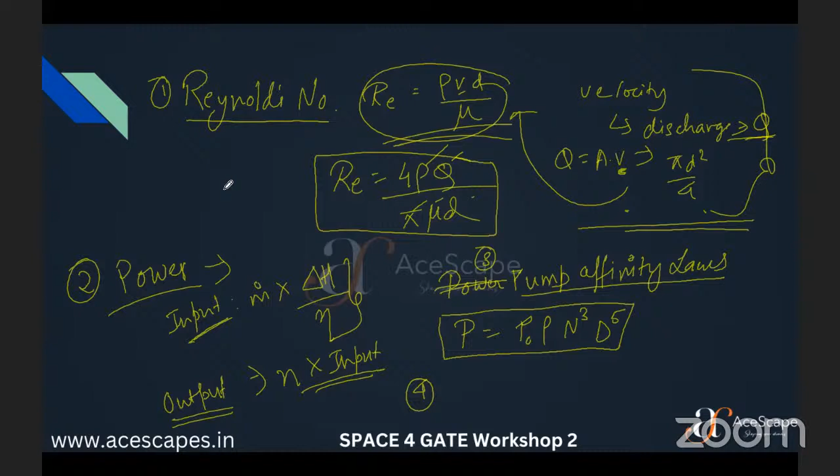Fine. This is 3. Another thing you will come across is when there is a cylindrical flow. Is there a next slide? There is no next slide. Okay, fine, I'll write it here only. You all wrote it, right? Because now it won't be visible. Wrote all the formulas?

Yes, ma'am. So there is going to be this cylindrical pipe, and they'll ask you about the velocity, the shear stress, head loss, etc., for the flow inside this cylinder. I've explained these kinds of flows in much detail in the classes I took previously, so you can check those lectures out. Here I'll quickly just give you what we have to apply.

So here R is the radius of the pipe, L is the length of the pipe, shear stress is happening across the wall, and there is some velocity U by which it is flowing. Let us say there is some pressure P1 and pressure P2. This small distance will be our dx or delta x, and the small pressure drop will be delta P, which is P2 minus P1, right?

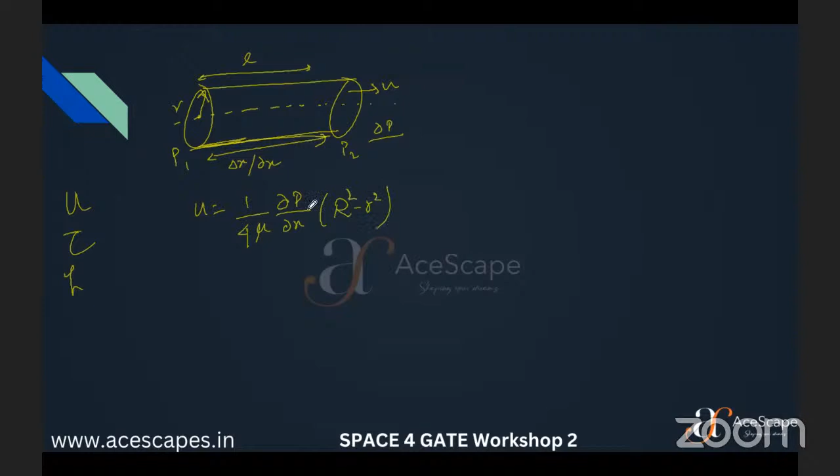So U, the velocity profile, is given by 1 by 4 mu dp by dx, times capital R squared minus small r squared, where capital R is the full radius of the cylindrical pipe, and small r is the point where they have asked us to find the velocity. Say this R is 5 meters, and they ask for the velocity at radius 3 meters. So small r here will be 3 meters. It will depend on the question.

This is your formula for u, the velocity, and your shear stress is given by r by 2 dp by dx, where r is the radius where they have asked, and dp by dx is the pressure gradient. They will give you the pressure gradient directly, or they'll say the pressure drop is, say, 30 kilopascals across a length of 5 meters. You have to apply it like this. Is it clear up to this much? Yes, ma'am. Start solving questions and then we'll see what else we have to do.

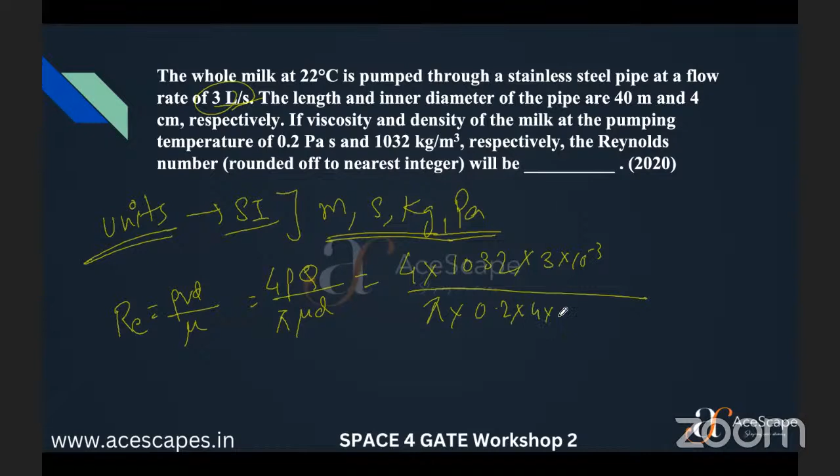Second one. So what we had to do: density is 1032. Q here we had to be careful with. It is given in liters per second, we had to convert it to meter cube per second, right? Then pi mu 0.2, and d here is 4 centimeters. So this is coming as something around 492 point something, right? Okay, confident. Now I'll move to the next question.

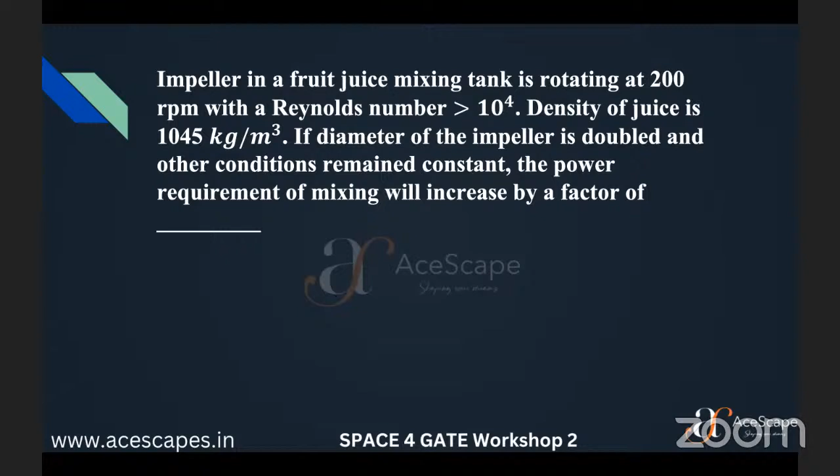Easy peasy, yes or no? Public. Yes, sir. Okay. Isha, guys, if I'm sharing the whiteboard, is it visible? Are the slides visible to you or not? Are you sharing, sir? No. I shared this slide. Stop sharing. I'll stop sharing so that you can share. I have shared this. Can you see the whiteboard? Yes, sir. Isha, have you answered it? Yes, I can share. Okay. So.

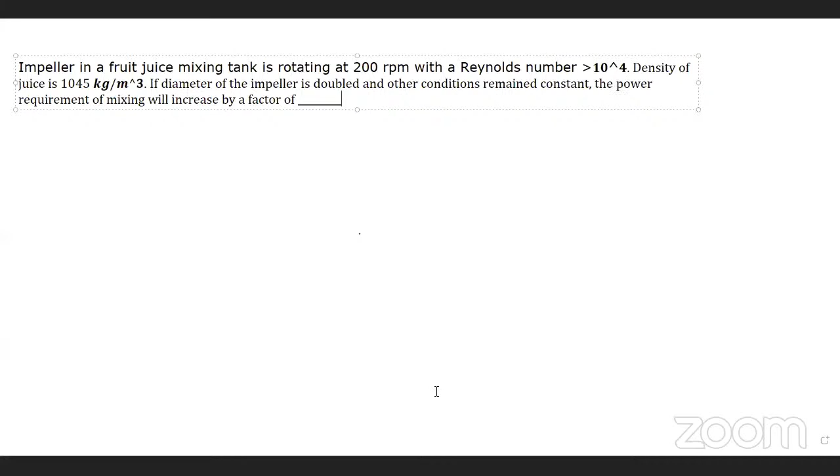Okay. Public, I can see only 9 people have answered out of 33. Not good, not good. Some are going 1 by 32, maximum are going 32, 1 by 16. So there is a distribution of answers everywhere. Visible, public? Yes, sir. How many have given the answer in the poll?

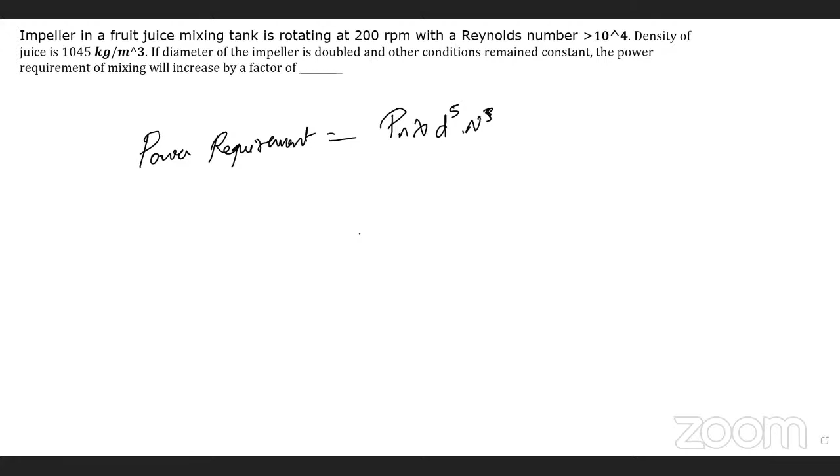But for the time being, you remember this. Power consumption or power requirement is directly proportional to this and this and this. So we have to remember P is proportional to D to the power 5 when everything else is constant, density, viscosity, everything is constant. And P is directly proportional to n cube when diameter and all other properties are constant. Same for Q, D cube, and this Q is directly proportional to n.

Another term, any other one, public? Pressure, right? One is power, discharge. Another is what? Forgot? Pressure head, right? It is proportional to what? D square. And it is directly proportional to what? N square. Yes or no? Yes, sir.

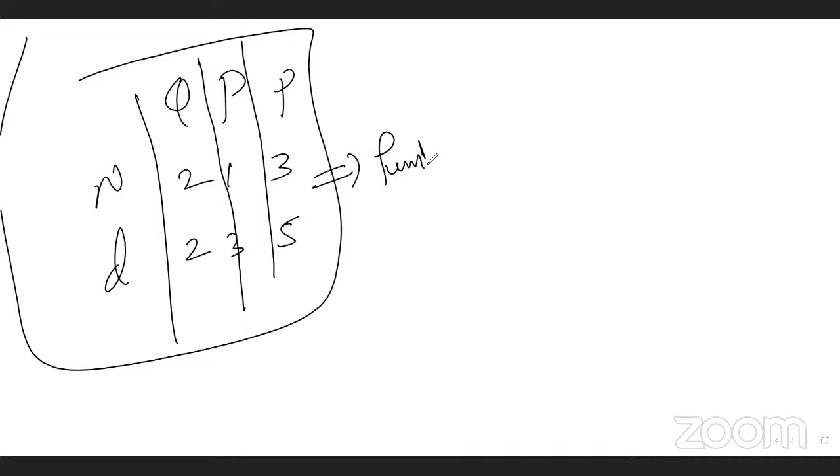Yes, sir. So how do you have to remember? Q, H and P and D. What? 1, 2, 3. Yes or no? Will you remember the table? Yes, sir. So this is pump affinity, mixing impellers and power loss. One will come in all three. Okay? Clear? Yes, sir. It's nothing, this is just a way to remember it. Easy. Let's go next.

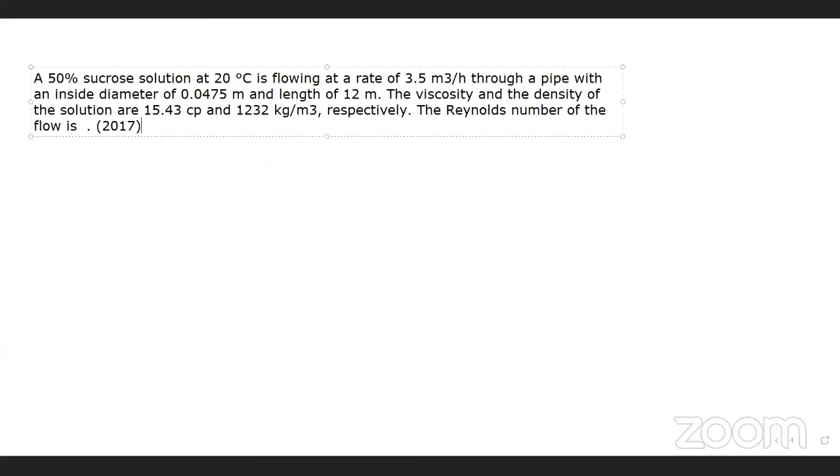Is the next poll visible? No. No, sir. Now, yes. And those who are not able to see the poll, I am just dropping the question here only. Isha, are you ready for the next question? Isha? Is my whiteboard visible, everyone? Yes, sir.

So this is the same concept which Isha has taught recently. Yes or no, Isha? Hello, am I audible? Things which are most common. That's it. Those who have answered taking this into consideration, it's over, game over for you.

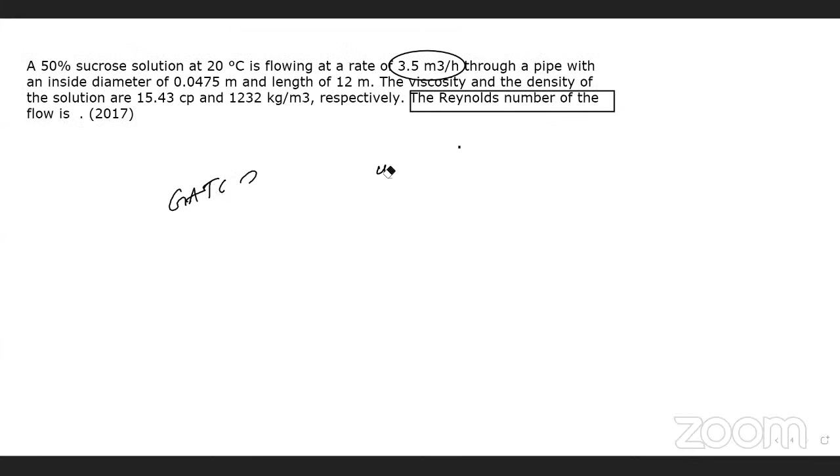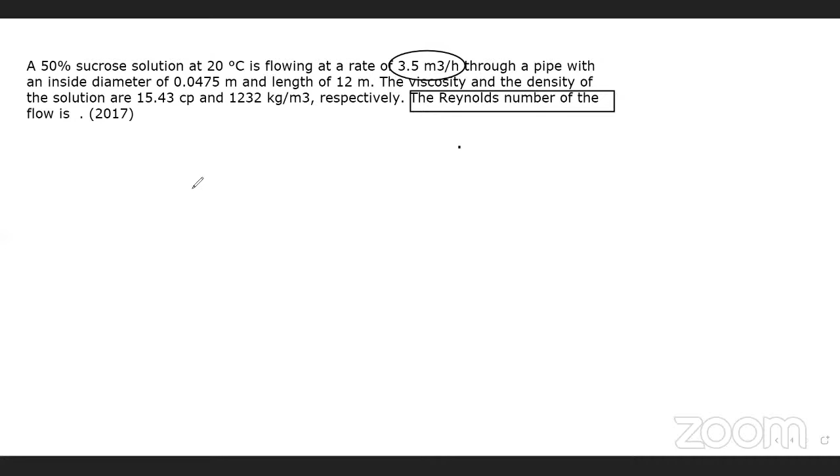So shall I solve this question? Yes, sir. I'm sharing the results, and the results are here. So what is given? It is given V dot, okay? That is 3.5 meter cube per hour. It is also known as Q. It's denoted with Q. So this was given, right? Q was given. And what else is given? Diameter is given, 0.0475, sorry.

And mu is given as 15.43 into 10 to the power minus 3. So what we need is RE, right? Everything was given; V was not given, Q was given, okay? And rho equal to 1232 kg per meter cube. This unit is meter cube per hour. We need meter per second, yes or no? So what we'll do, we'll divide by area. No need to go anything, just put directly here.

So 1232 into 3.5 by 3600, because to convert into meter cube per second, divided by 0.785 into d square, that is 0.0475 square, multiplied by d. Just write d for the timing. So pi by 4 d square, d cancels with d, only d remains. So we used to write pi by 4 directly as 0.785. Done, yes or no?

So solve it: 3600, 0.0475, 15.43 into 10 to the power minus 3. Answer will come like 2081.47. Check it. Okay? Now you quickly answer so that we can give more time on the solution part. This is done.

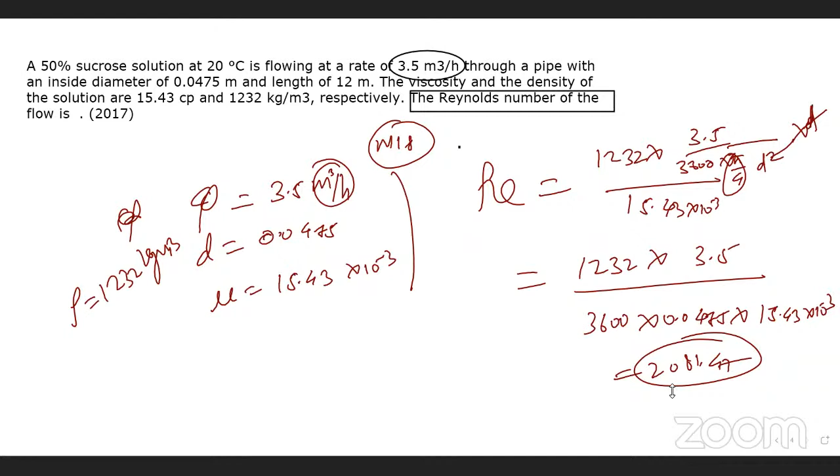Next poll. Are you ready for next poll? Yes, sir. Go ahead. Quick. Is the poll visible? And not more than 1 minute. Yes, sir. Submit.

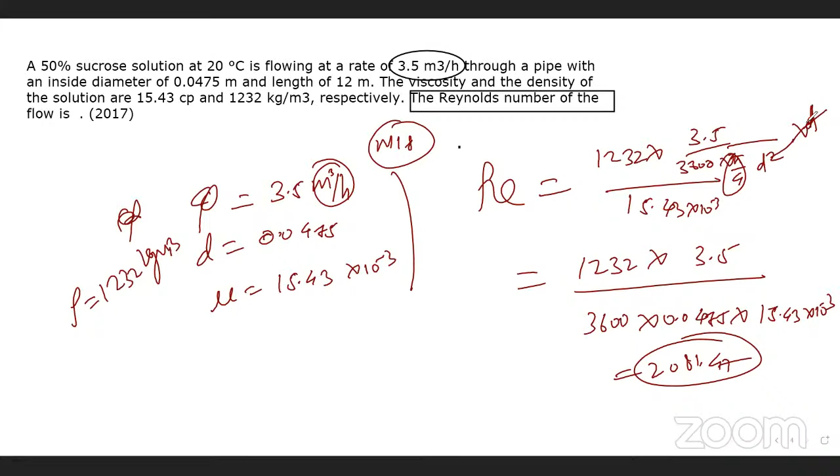So what is the formula of power number? Power requirement or power consumed. This is power divided by rho and N cube and d to the power 5. Done. So what will power consumption be? It will be multiplied, yes or no? That's it. And what is this? This is the liquid density. Done. Easy.

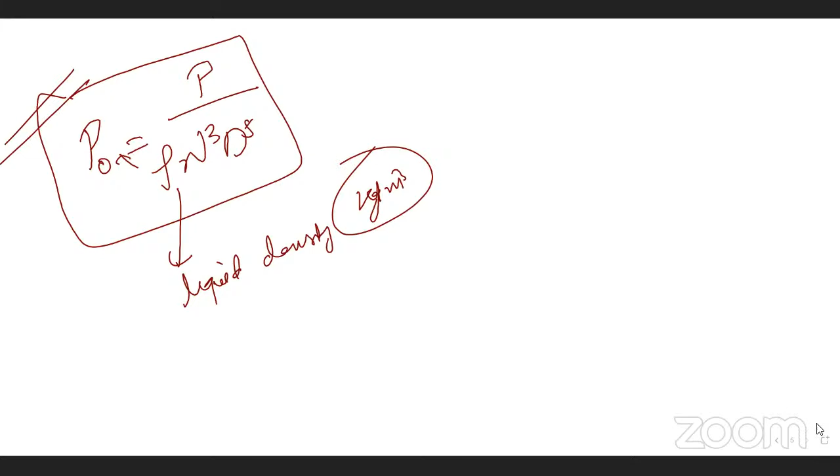Isha, take the charge. Which question are you taking? Next two questions I'll take. Go ahead, share the screen. Wait, I'm trying. So this is the next question. Okay, try everybody. Isha, what is the answer? Just send me the answer, I'll put it in a poll. So you all have the poll with you. Poll is visible, okay?

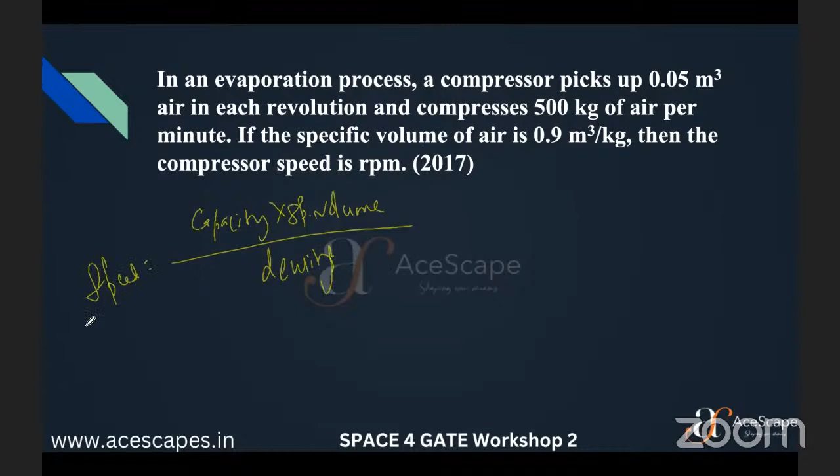But suppose you don't know, what will you do then? Look at what they have asked: the unit, rotations per minute. They have given meter cube per revolution. Compresses 500 kg air per minute, so kg per minute, and specific volume of air, meter cube per kg.

So can we manipulate these units to get this? We require rotations per minute, so minute in the denominator and rotations in the numerator. So this needs to be inverse. Rotations per meter cube multiplied with kg per minute, and to cancel kg and meter cube, multiply by meter cube per kg. Then we get rotations per minute. Now put values: kg per minute is 500, meter cube per kg is 0.9, and divide by 0.05, RPM is coming, right?

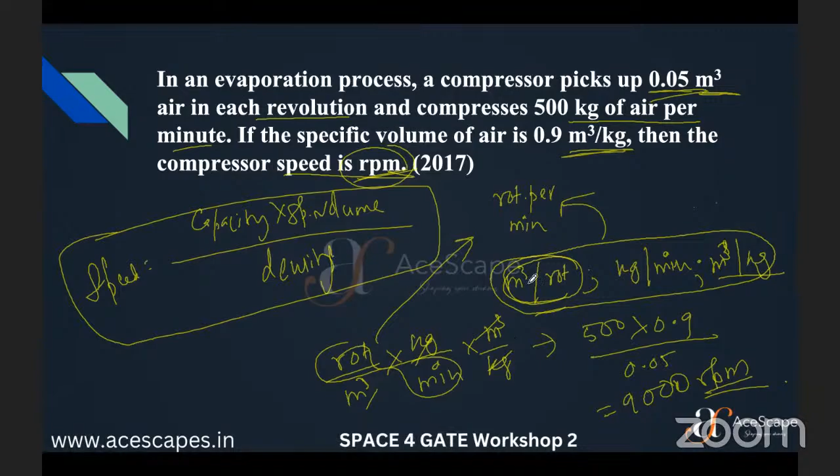Are hi na public? Yeah. Dikh raha hai na? Yes, sir. Wait. Isha, you can share the next problem. Okay. This is the next problem. Okay. Right. And the poll has been launched. Okay.

This is what I was telling you about the cylindrical flow inside a pipe. लोगों को आंसर ही याद है लगता है. Because I have discussed this one in the class, right? Those who attended the class, they'll know. And the same thing I also took in the session, boot camp.

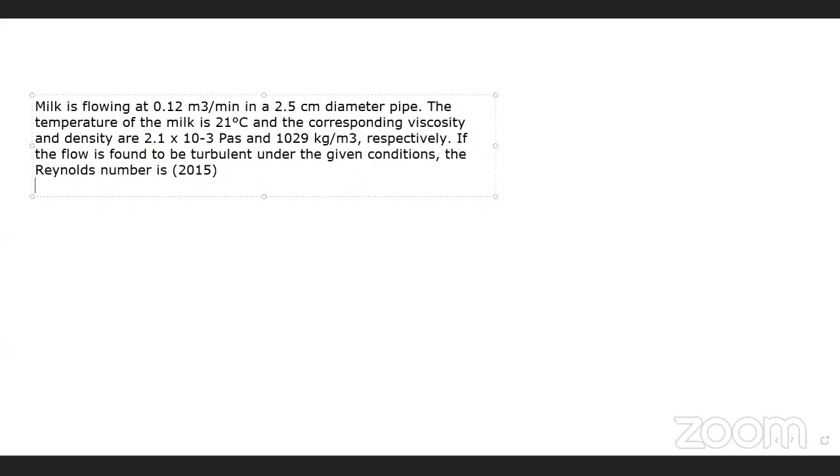Is the poll visible, public? Esha: Yes sir, it's visible now. Yes, sir. Esha, are you there? Am I audible? Yeah, I'm here. I have sent you something on WhatsApp. Check it. Okay.

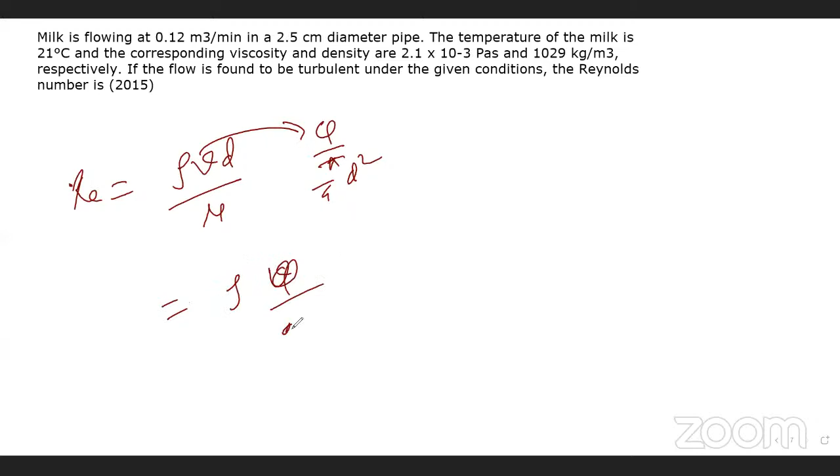Share the results and quickly I'm just writing the formula and units. You guys help me in this. Okay, so Re equal to rho vd by mu. So v is not given but Q is given. Yes or no? So v is what? Q by pi by 4 d square, right? Yes, sir. So in place of v, Q by pi by 4 d square, into rho into d upon mu. So it will be like 1029, right?

Yes, sir. 0.12 is in meter cube per minute, so we have to divide by 60. Yes or no? And into diameter, that is 2.5 centimeter into 10 to the power minus 2, into pi by 4 into mu. Mu is what? 2.1 into 10 to the power minus 3. Done. Solve it, you will be getting 49910.99. Is it coming or not?

Yes sir. What do you have to write in place of pi by 4? Never use pi by 4, yeah. Use 0.785 for quick calculation. Check it, this answer will always come. Put 0.785 in its place quickly and get the answer. Okay, everyone?

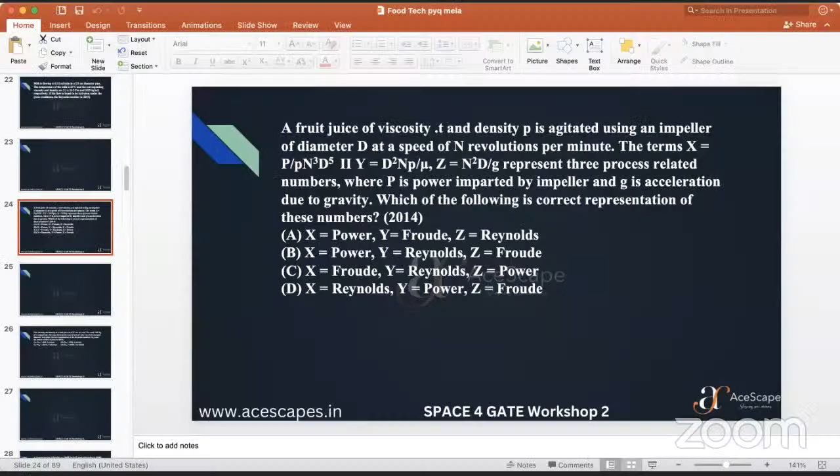Isha, are you sharing your slides? Isha, are you there? Hello. Is my slide visible? Yeah, now it's visible. Sorry again, everybody. I can see only 11 to 14 people always answer. Now 46 people have answered, so you can take the question. Okay, we release the result of the poll. Fine, everybody got it. Mic off, public. So, what did you guys do? Tell me.

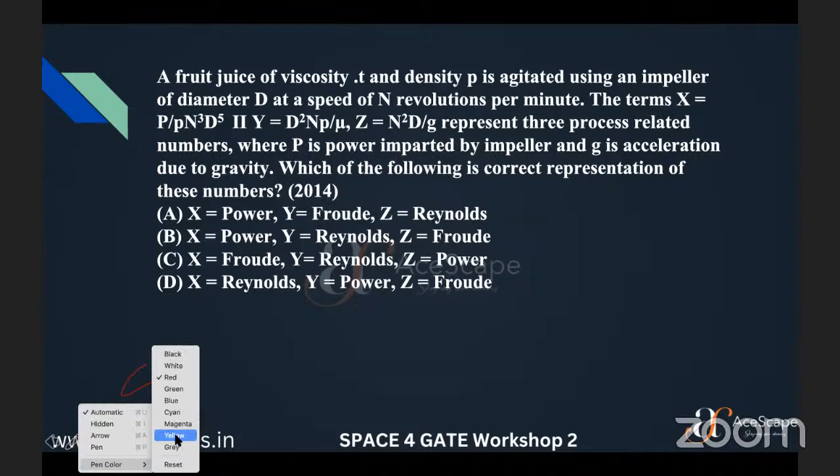So they've given X is rho N cube D power 5. Z is equal to N squared D by g. So we know power is given by power number into rho into N cube D power 5. We know Reynolds number is given by rho V D by mu, and Froude number is given by V by root Dg. So clearly we can see that there is some gravitational acceleration.

So this will be our Froude number, because Froude number is inertial force by gravitational force. This somewhat resembles Reynolds number, and this one comes under power number. But why is there a D square here where it's just rho V D? Why is there an N square? Original Froude number is V by root Dg, but here they have N square D by g. What manipulation did they do, and why?

Subham, Suraj, speak up. N is flow rate here. No, N is not flow rate, it is RPM. So it is angular velocity. And V is equal to RPM into D, right?

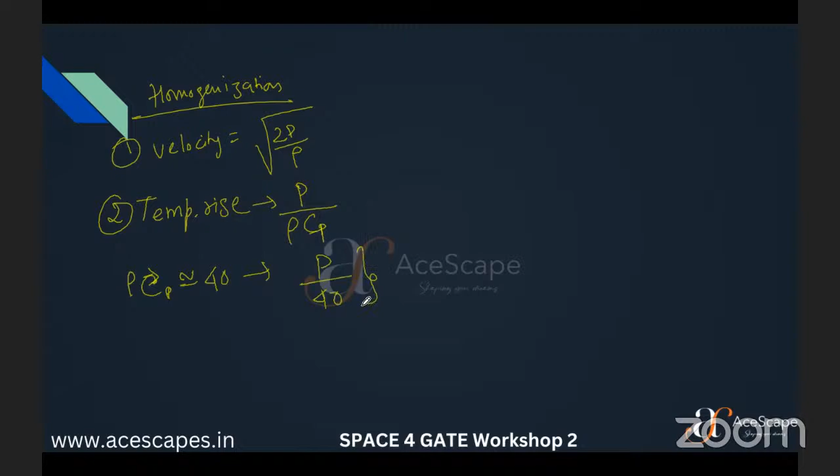Fine. Another thing they'll ask is temperature rise. That is given by p by rho Cp. Sometimes they may or may not give you rho Cp. Just know, the rho Cp value usually comes to around 40. So if you want, you can simplify your formula to p by 40, if you are not given the values of rho and Cp.

If let's say it is alpha, then cos of alpha by 2 is equal to dr plus dp whole divided by dr plus df, where dr is the diameter of the roll, dp is the distance between the roll surface and the particles, and df is your feed diameter. Fine. Another thing they might ask, coefficient of friction. This is given by mu equal to tan alpha by 2, once you find the angle of nip.

Capacity also they can ask. Capacity Q will be given by pi into N, your rotating speed or RPM, L the length, multiplied by dr dp, the roll diameter and the distance between the roll surface and the particles. Fine. What else? Fineness modulus.

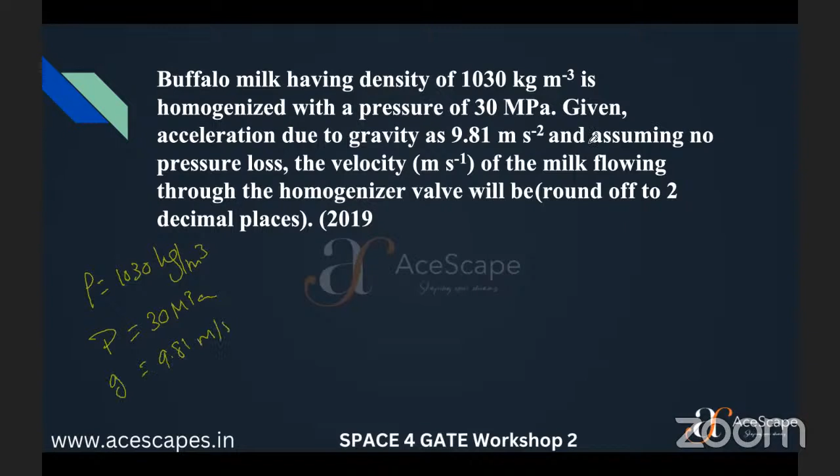All right. This one is the homogenization question. Buffalo milk has density, so they have given the density here. Pressure is given 30 megapascal. Given acceleration and no pressure loss, the velocity of the milk is root of 2P by rho. So 2 into P is 30 megapascal. You have to convert the megapascal into pascal, so 10 power 6, whole divided by 1030. What is the value coming? 241.35. Fine. Meter per second. This is your answer. Fine.

These are all direct formula only, right? You might be wondering why they have given this G value. It is because it comes something like V squared by 2G given by the pressure head. From here you calculate, but ultimately the value boils down to this only. Fine. You don't need to do the derivations. Okay, the next question we will take.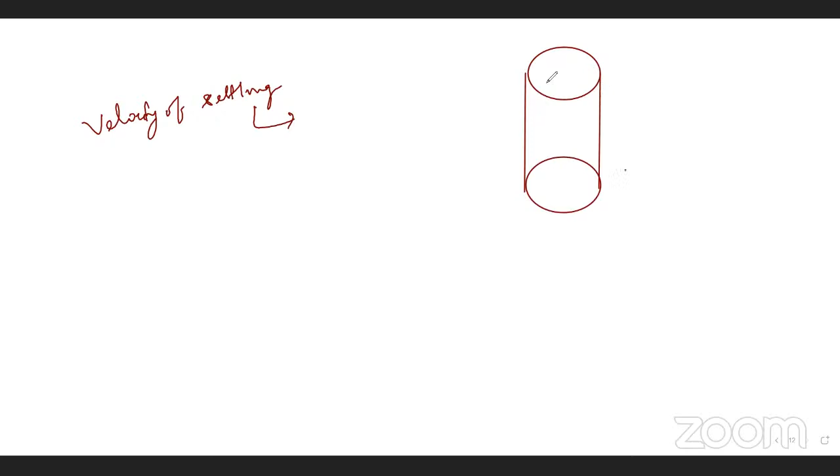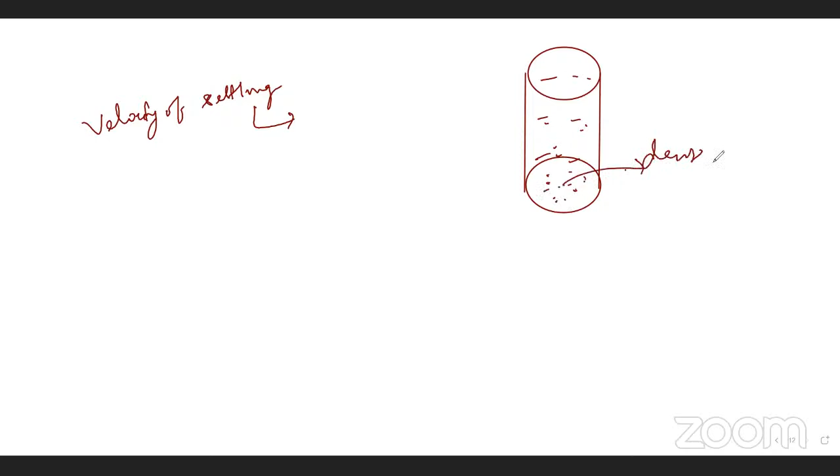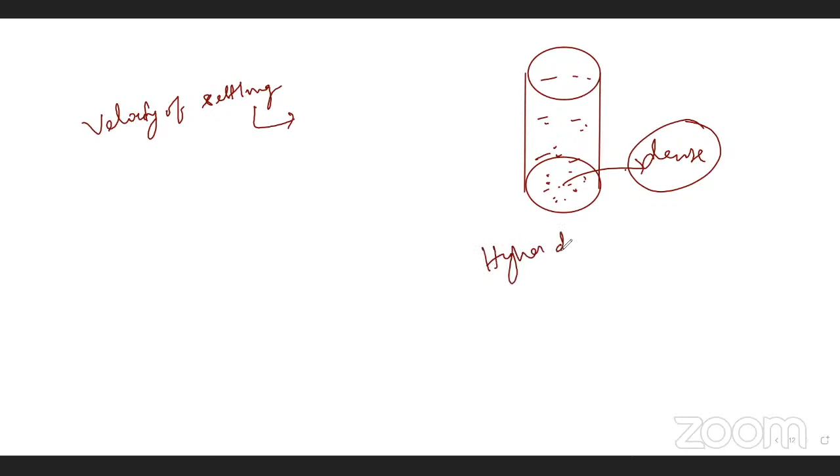So okay, particularly this is something where you have kept the milk only. So at certain time, if you keep the milk like that, something will settle here, right? If there is some dense particle. So higher the density, faster it will settle. Yes or no? Yes sir. Higher density, faster settling. Look, I'm telling a concept, a question has come in GATE on this.

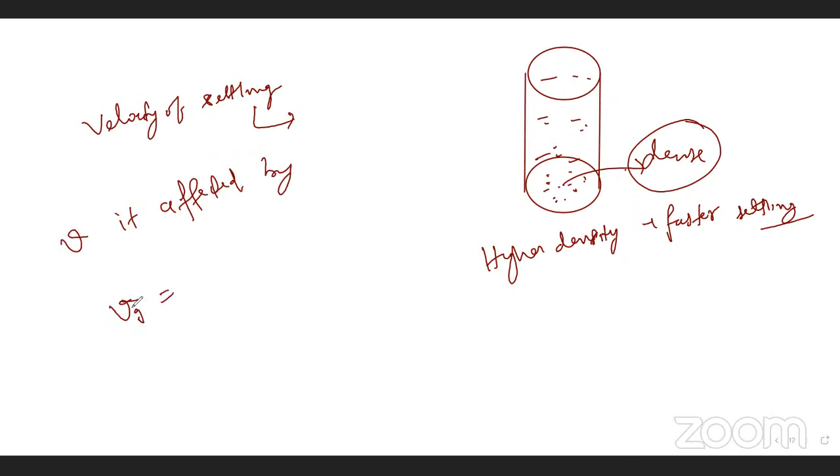Okay. So the question came like the velocity of settling is directly affected by. So we have to always remember, if it is general with the help of density or no other external force, remember Vg here. For me, I used to remember with some notations only. So what is it? Anyone? One thing is common. Okay, g Dp square. Then rho p minus rho. Yes or no? Yes, sir.

And what is this rho? Anyone? This is like if two materials are there, two kinds of liquids are there. So liquid 1, liquid 2. So rho 1 minus rho 2, or rho 2 minus rho 1, the bigger minus smaller. So, okay, public, are you there?

Yes, sir. Okay. So where gravitational force is acting, g Dp square delta rho by 18 mu. This whole thing is going to be constant when you are applying centrifugal, with omega. So what is the formula? Omega square r Dp square delta rho by 18 mu. Yes or no? Now these are two formulas. Third formula you will be writing is the G-fold number. Those who want full explanation of how it came, just watch my centrifugal lessons, there's so much in it you'll enjoy it.

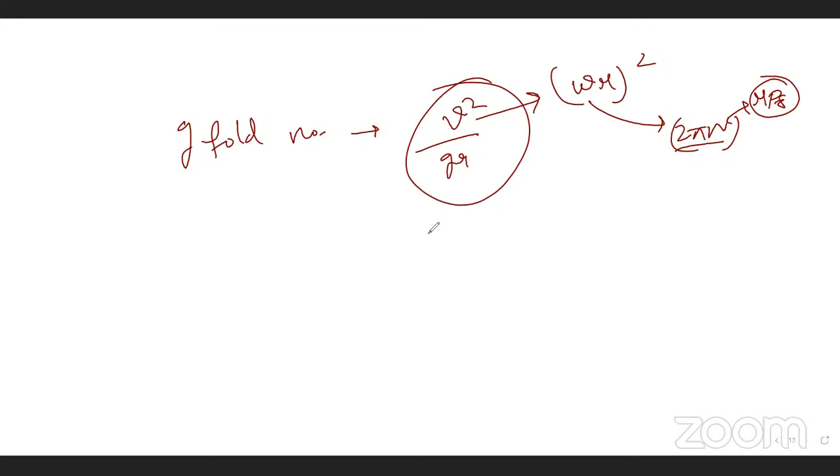Hello? So what is it saying? So we need what? G2 by G1. It should be 8 coming. आएगा कि नहीं आएगा? हाँ sir.

How many of you got confused with this? बताता हूँ मैं, चलो. They are asking how many times the G number has been increased. So what you have to take? You have to take the ratio of G2 by G1. So 2 pi n, okay, you are increasing that, whole square, divided by gR. यही है ना? अरे हाँ या ना? R square भी आएगा. अब रेशियो ले लो.

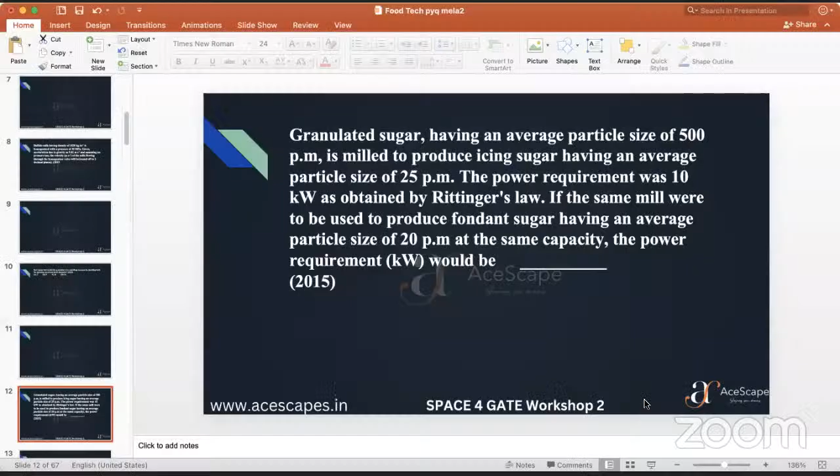Isha, what is the next problem? You are taking? I'm taking. Yeah, go ahead. Cool. So you can see. Try solving.

Here they've given Rittinger's law. So apply, you know the formula, apply it. Another thing, they have asked for power requirement, right? So our feed rate is constant here. Power is changing. That is what we have to find. What is the formula we are going to apply? Anybody? What is the formula for Rittinger's law? E is equal to Rittinger constant KR into 1 by x final minus 1 by x initial, right?

Here, since it's a constant, you can remove it because we are supposed to find this in ratio format, right? So whatever is constant goes away. So this will be P by F is equal to 1 by x final minus 1 by x initial. So here we can write P1 by F1 by P2 by F2 is equal to 1 by XF minus 1 by XI, over 1 by XF minus 1 by XI 2. So here F will be constant only.

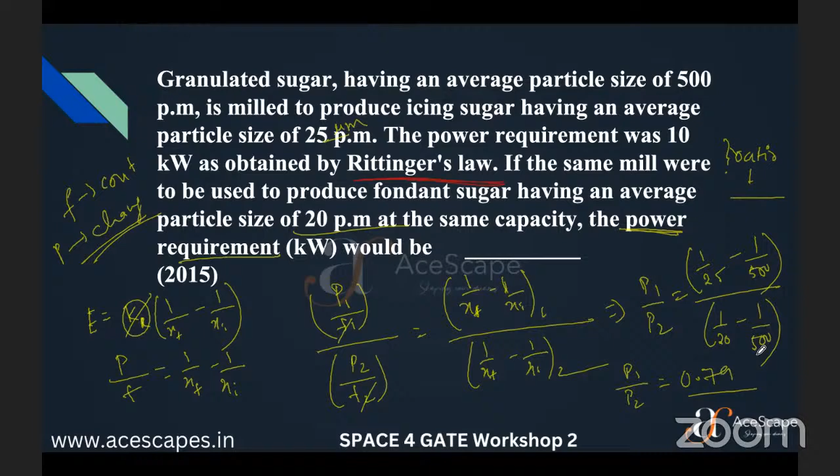So we will have P1 by P2 is equal to 1 by 25 minus 1 by 500, this is not PM, it's mu m, whole divided by 1 by 20 minus 1 by 500. So what is the value of P1 by P2 coming? 0.79. Okay, fine.

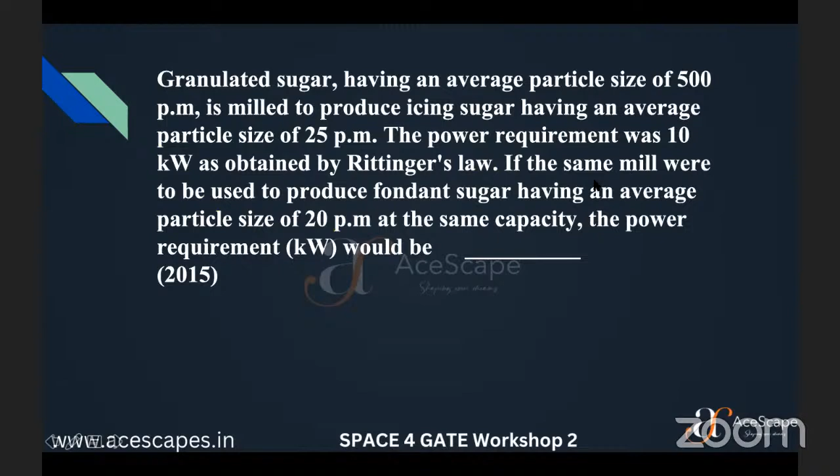P1 is given as 10 kilowatt, right? So our P2 will be 10 by 0.79. What is the answer coming? Some 12 point something? 12.63. Fine. This is your answer. This is all just calculation. Try to minimize the calculation by finding out the ratios. Next question, sir, you'll take, please.

Hello? So are you there? Yeah, screen visible, Isha? Yeah. So which you have taken? Granulated sugar, right? Yes. So एक क्वेश्चन है मास एनर्जी बैलेंस का, but we will take it थोड़ा later. एक अच्छा वाला प्रॉब्लम करते हैं यहाँ से. The same type of problem.

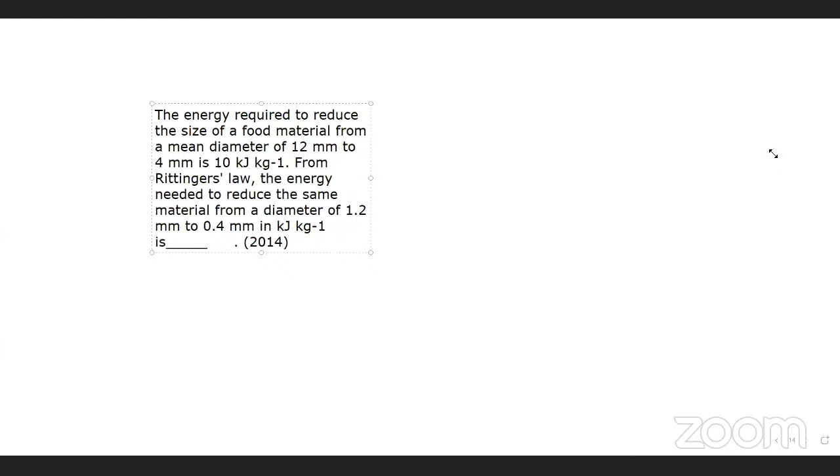Now, bolo, quick. So what is the formula for Rittinger's law? No one is going to speak. KR into 1 upon XF minus 1 upon XI. Rittinger. यही है ना सेटअप? Yes, sir.

So it's saying energy required to reduce the size from 12 mm to 4 mm is this. The energy needed to reduce the same from 1.2. So 12 to 4 and 1.2 to 0.4. What do you take? You don't need to calculate KR, you don't need to calculate anything. Any change in the feed rate? No sir. Feed rate में कोई change बोला है?

Hello, public. Feed rate में कोई change बोला है? No, sir. So E equal to P by F, right? Yes or no? Yes, sir. So no change, directly we'll take E. So E1 by E2. Okay, KR cancel everything. I'm writing. चलो एक बार formula लिख देते हैं. 1 by x2 minus 1 by x1. यही है ना formula? Yes, sir.

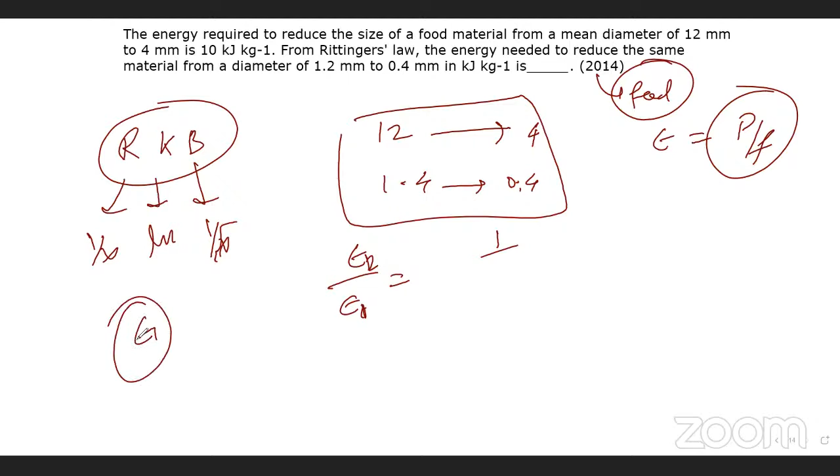Hello. So E1 निकाल सकते हो public तुम? Or is it given? Given है. Given है, खत्म. So what is left? Sir, simply we will be writing the answer, nothing else. So 1 by 4 minus 1 by 12 upon 1 by 0.4 minus 1 by 1.2. देखो कुछ similarity है. यहाँ से तुम 10 common ले लो. So it is 4, 12. Cancelled out 1 by 10, so 10 into 10 खत्म.

Easy है. Yes, sir. Ratio दिखा तुमको, what I am saying? हाँ सर. Okay, it's 1.2 ना, यहाँ पे 1.2 लिखना है. मैं 1.4 लिख देता, गलती, my bad. So it's simple. हाँ sir. So if you make such kind of structure, directly तुमको दिख जाएगा. So no need to apply the formula also, because we know this by this and this by this. हाँ या ना, formula की जरूरत पड़ी नहीं सर. खत्म. आगे बढ़े.

Yes, sir. ईशा, sir, next problem. ईशा, are you there? Yes, I'll share.

देखो, why we are taking a joint session, because दोनों के अलग अलग concept हैं, दोनों के अलग अलग तरीके हैं. So you will be learning multiple concepts in a single session on similar types of problems. Yes or no? हाँ sir. So it's your choice which method you like, you go ahead with. Sometimes whichever method clicks, that's better.

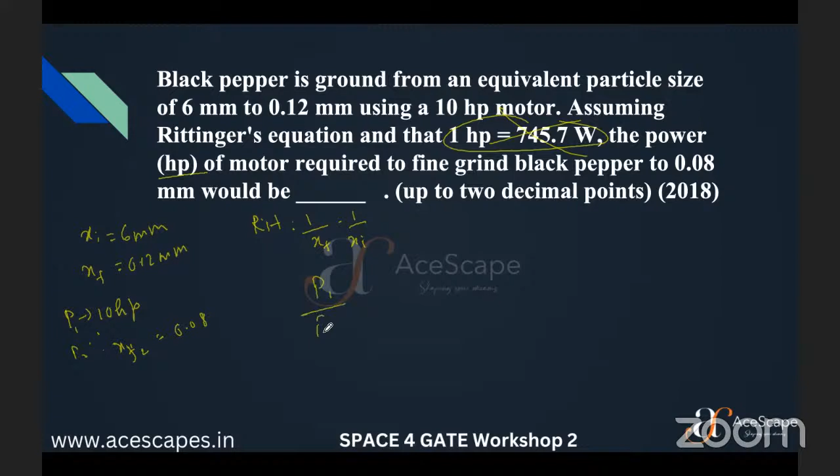And our second operation, where our X final 2 will be 0.08. P1 is given, P2 we have to find out, right? So P1 by P2, again, feed rate is constant here, as you can see from the question. So 1 by XF minus 1 by XI of the first operation, by the second operation. So we have 1 by 0.12 minus 1 by 6, by 1 by 0.08 minus 1 by 6. What is this coming? 15.11.

Okay, then our P2 will be P1 by 15.11, which is 10 by, right? So nearly around 0.34? No, 0.6618, something like this is coming. Fine. Yeah, 2 by 3. Everybody got it? This is easy, right? You can all do it. Yeah, you can answer and go ahead. I'll take the next problem. Fine, all right.

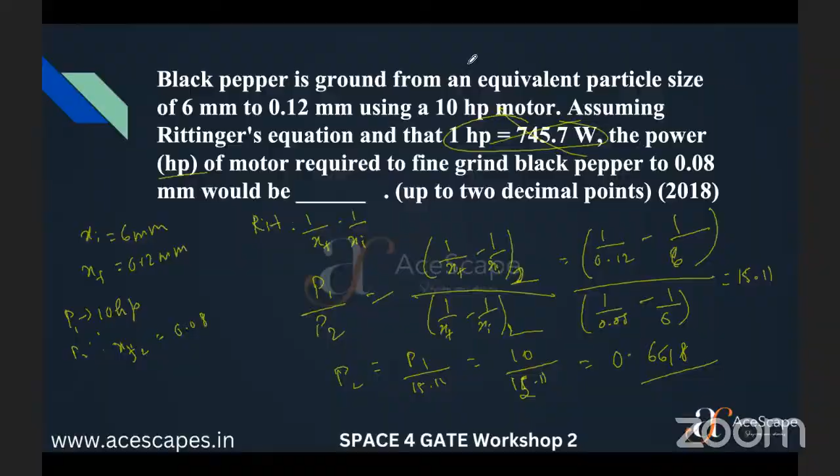So quick, next problem. दिख रहा है? नहीं. अरे क्या बात कर रहा था? हाँ अभी दिख रहा है. 30 seconds. कोई answer बोलेगा नहीं. If you have the answer, when I say write in the chat box, that time you write in the chat box. Isha, be ready with the next problem you are taking. So check WhatsApp once.

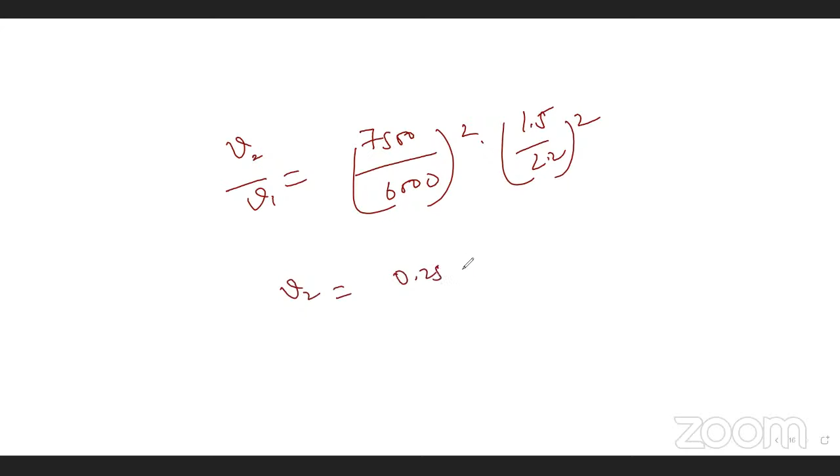Easy calculation. 576. Get the answer. What it's coming. Quick. कितना आ रहा है? 0.18. 0.18 के आसपास आएगा कुछ, राइट? हाँ सर. खत्म. इजी है.

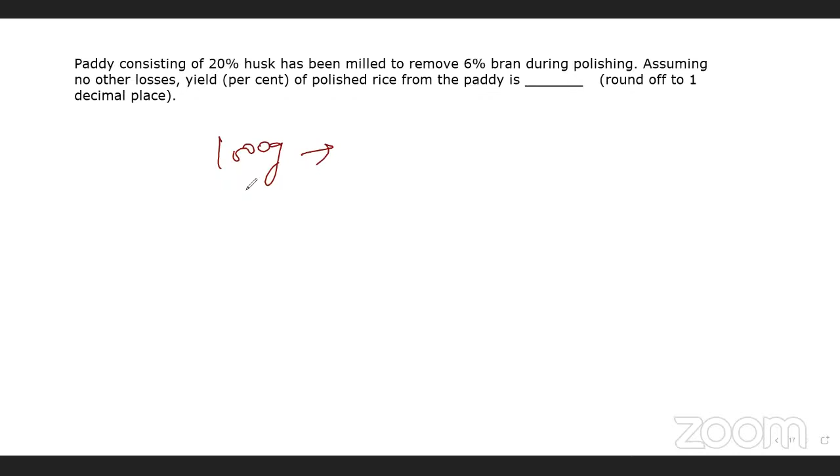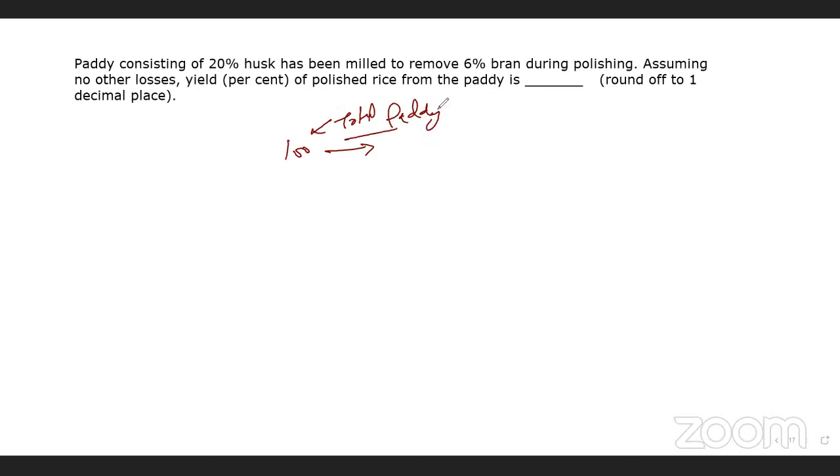चलो 100 से solve करते हैं. लोग बोलेंगे why sir 100 को नहीं use किया, चलो 100 use कर लेते हैं. I can solve even with 1 also. Let's take 100. So 100 was the total paddy. So paddy consists of what? Sir, it consists of husk, bran and endosperm or polished rice. Yes or no?

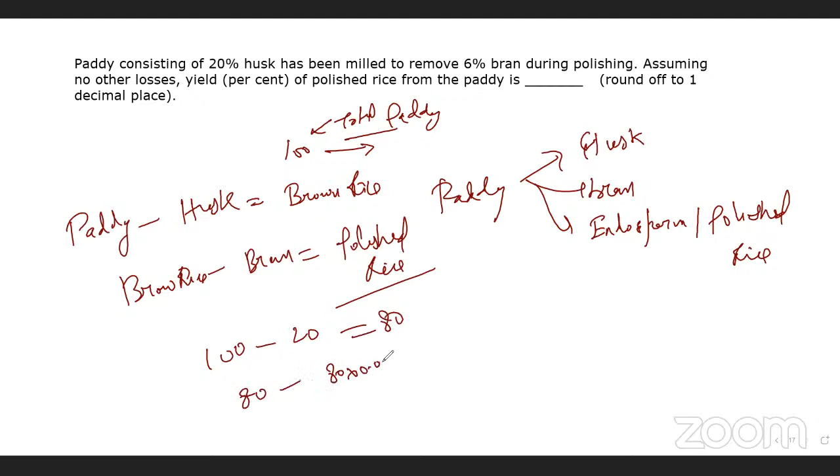So let's talk about paddy minus husk. What do you get? Brown rice. And brown rice minus bran, what do you get? Polished rice. So put it 100 minus 20 equal to 80, and 80 minus 80 into 0.06 because 6% in the brown rice. Yes or no? 6% to remove during polishing. So during polishing, matlab already iske andar tha. In this the 6% was there.

So get the answer, 80 minus how much? कितना आ रहा है? 4.8. Yes or no? So how much? 75.2 gram. That is how much? 75.2%. Yes or no? अरे आया? Tough था क्या? Mass balance ही था ना, कुछ नहीं था. Only you should know the concept of this. अरे tough था public.

Okay, Mayank Dixit has answered. So ये concept कितने लोग click किए थे before I solved? Anyone? How many of you clicked this question concept? +1 करना. Mayank. Cool. Now, बहुत easy है. आगे वाले problems और मजा आएगा. Isha, next is mine or yours? Okay, I'll take some. Or shall I take the pineapple one? Okay, I'll take pineapple one. Yeah, cool.

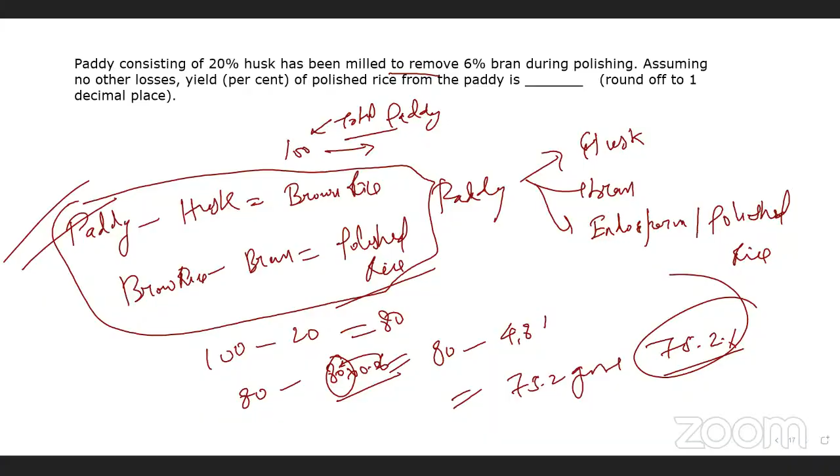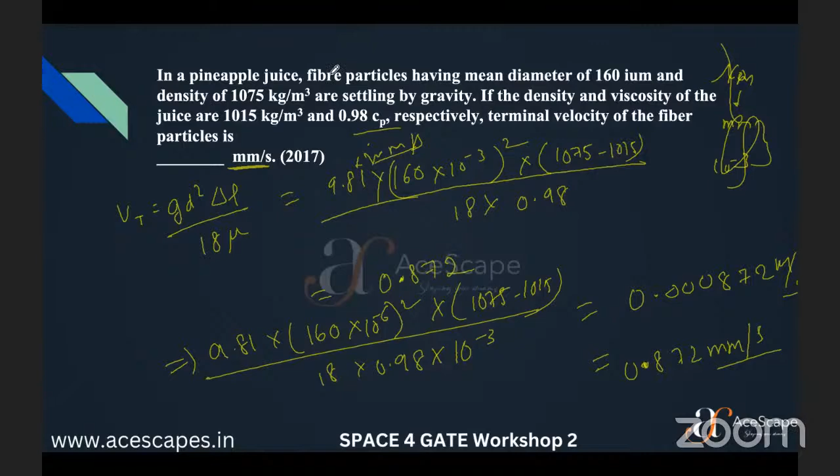Guys, don't do these things, it may confuse. Just do it in regular SI units only. Right. So from here you will get some 0.00087 something in meter per second. So you multiply it with 1000, you'll get 0.872 millimeter per second. Is that fine? Everybody? Okay, 854 is also fine. I think I'm getting some different value because I'm taking direct calculations. It's fine. Okay, next question, sir. The answer is between 0.8 to 0.9 only.

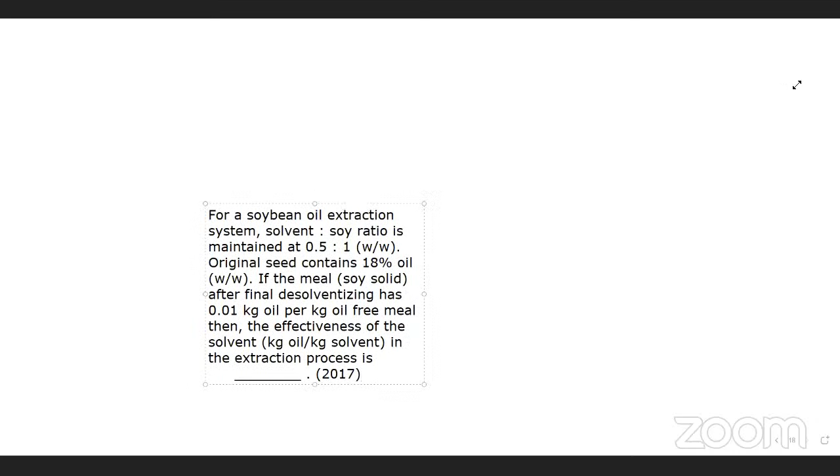Isha, done with that problem? Yes, sir. Yeah, so the problem for the next question is here. Is it visible? Yes, sir. GATE 2017 question. It's easy and it's peasy also.

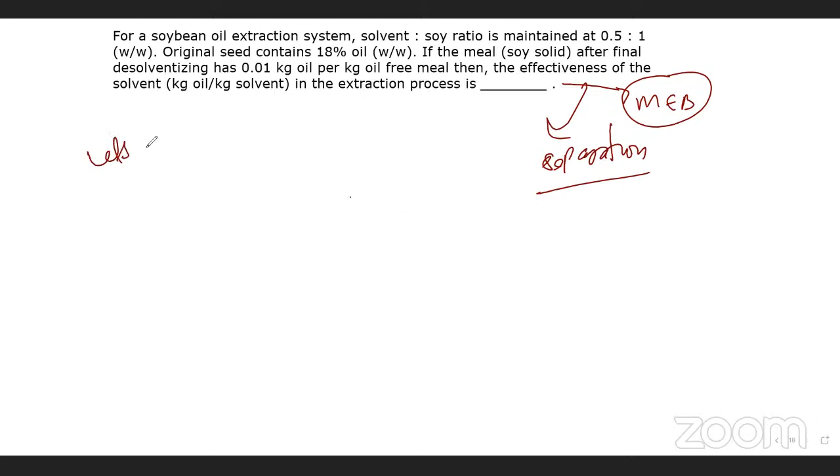Let's assume the soybean as 100 kg. So how much solvent will be required? 50 kg because it is 1 to 0.5. Yes or no? If it is, this is done. Make the box, finish it. 100, 50, and something is here. Yes or no? Yes, sir. Done. So do I have to solve the answer, or you guys will be solving this?

What is the solvent effectiveness? Effectiveness means total oil. So initially it was 18%, right? What is the oil content coming here? So oil content final upon oil content initial. That is your EF. Done. This is the only effectiveness in this whole problem. Rest all was mass energy balance.

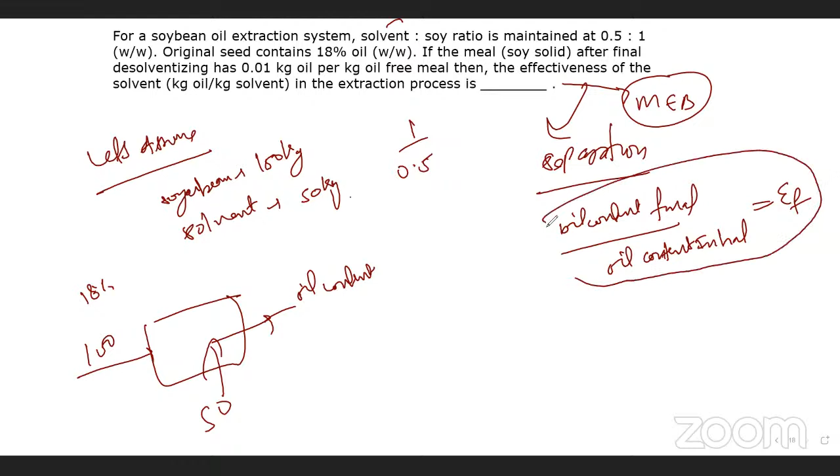So I won't go for solving this because I have already done very good problems in mass energy balance. So next problem I am giving something unique for effectiveness, because everyone is crying about effectiveness. So come and see this problem. For those who want to do it with the formula, I'll give you that formula too. And if you know the shortcut, you can apply the shortcut also. Isha, next problem you take it, okay?

Sir, it's over. Really? Now we have next psychrometry and refrigeration, right? Yeah. And drying and dehydration.

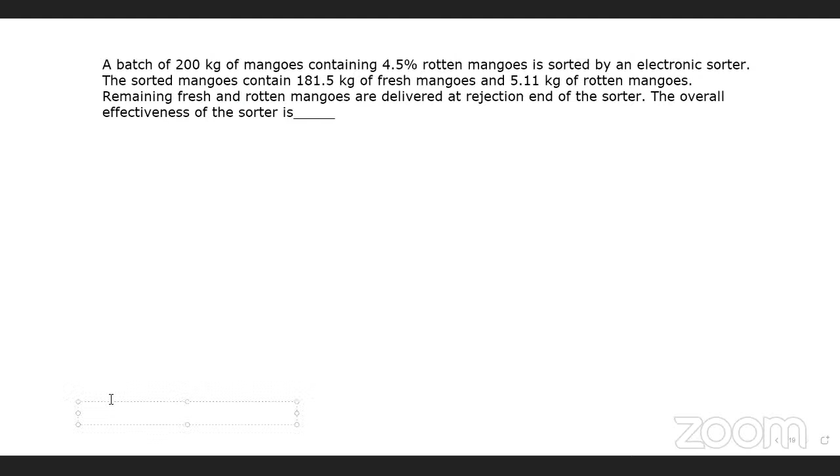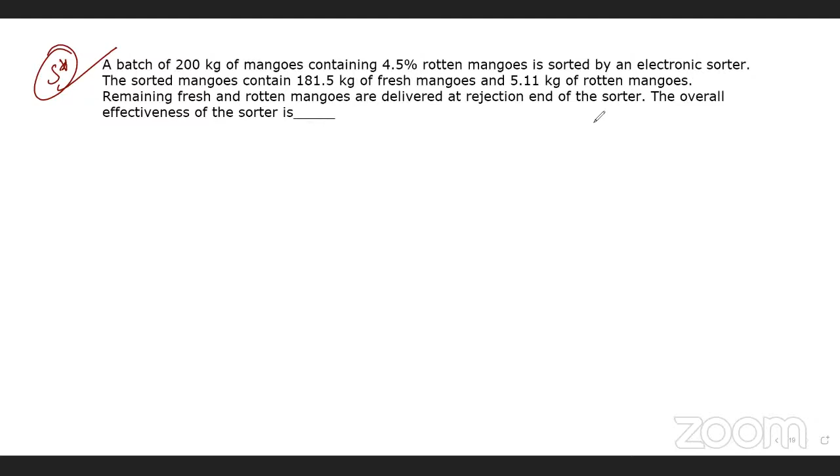Good in product by good in feed into bad in non-product by bad in feed. Good at product end by good at feed end, and bad in non-product. That's all that was needed. This is effectiveness. And you guys might have applied this dangerous formula, this minus this into this minus this, multiplied divided by this minus this.

Did the rest of you apply that? Ritik Mani, Hilal? Yes, sir. Let me tell you the exact formula. Suraj, say it. Product into product minus feed, into feed minus non-product, into 1 minus non-product. Divided by feed into 1 minus feed into product minus non-product whole square. How many of you applied this formula? Write +1 in the chat box.

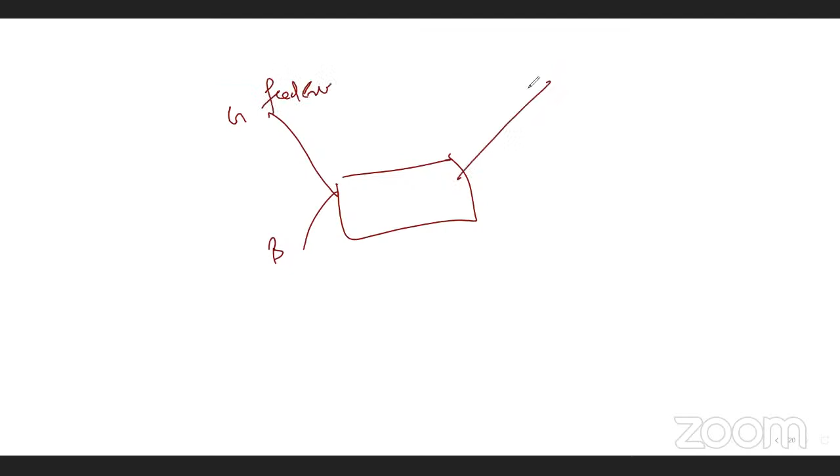Now let's talk about this thing. So it's simply mass energy balance, nothing else. This is good, bad. This is feed end. Here, product end. And this is non-product end. Yes or no? So what is your product? Sir, fresh mangoes.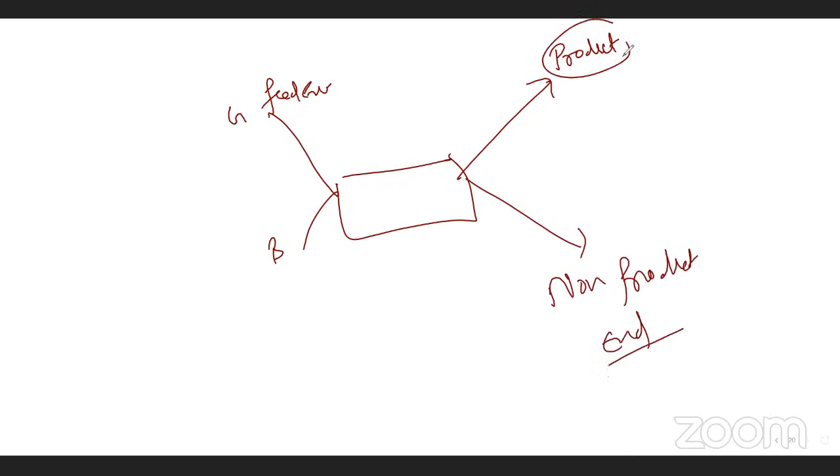Hi. Am I audible? Yes, sir, you're audible. Okay. Are you understanding what I'm writing here?

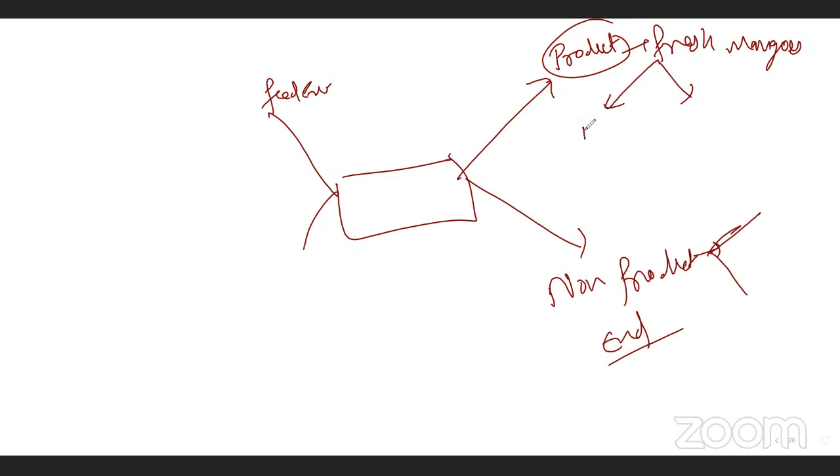Yes sir. So in this 2 things will be there. In this also 2 things will be there. So product is fresh mango. So fresh mango and rotten mango. In feed end, that is fresh mango and rotten mango. So they said total is 200 kg. But fresh mango is how much? Sir, 200 minus 4.5% of 200.

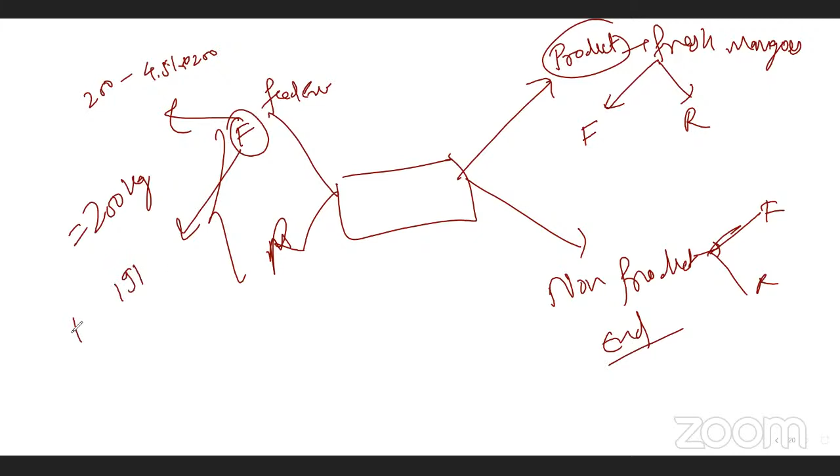So how much fresh mango? Very easy, 190? It's 191, sir. 191. So F equal to 191. R is 9 kg. That's the feed end done. Now what is the question saying? Okay, so let me remove this formula first.

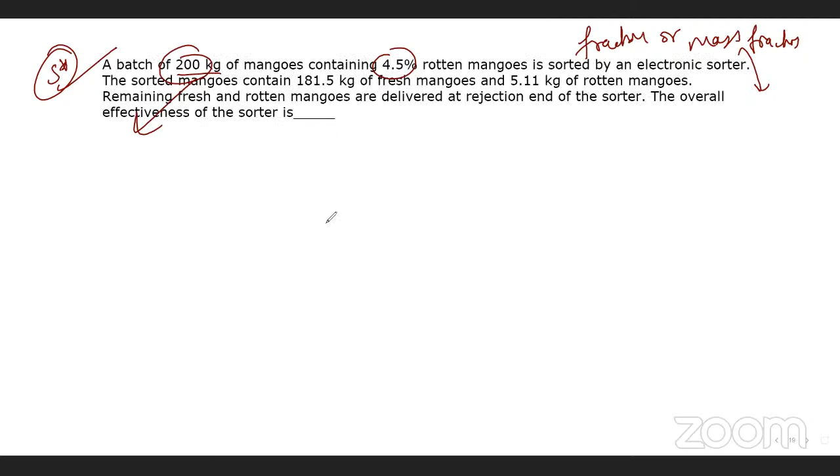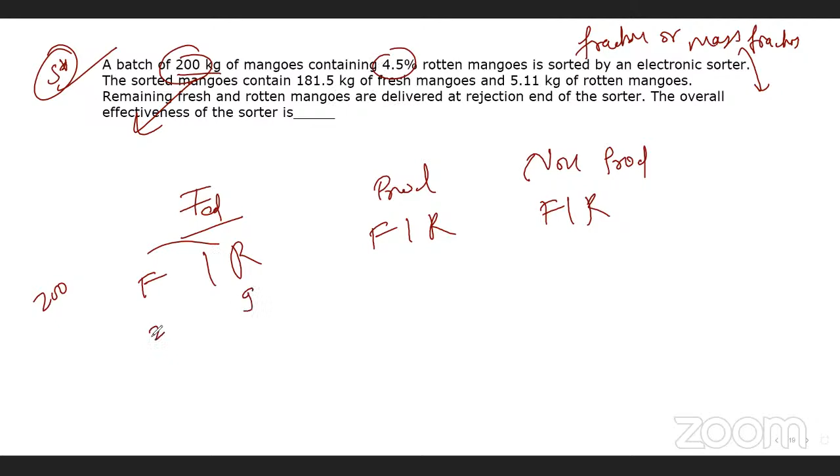Very easy, I'm explaining slowly because this is new for some people. So simply feed end, product end and non-product end. Fresh, rotten, fresh, rotten, fresh, rotten. So total was 200. 4.5% of 200, so this is 9 and this is 191. Total 200 kg.

Now product is 181.5 fresh and 5.11 non-fresh. Clear? And what is remaining? So non-product, this is mass energy balance. So this minus this equals this. Calculate, how much is it? 8.5 or 9.5? 9.5. And here it was 9, minus 5.11. How much?

3.89. Now what is the formula of effectiveness? Good at product end upon good at feed end, so 181.5 upon 191, multiplied by bad at non-product end, that is 3.89, divided by bad at feed end, that is 9. What's the answer? 41.07. If not asked in percentage, write in fractions or decimal only. So it's 0.41.

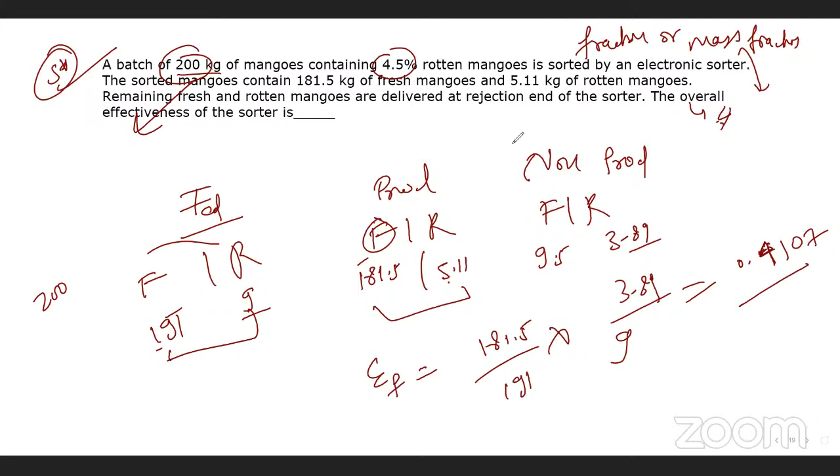Okay. Ritik Mani, anything new? Dheeraj? Yes, sir. Is it easy? Yes, sir. Easy. So more such shortcuts will be coming in future. Lots of them; if you have taken the course like these people have, they know very much. Okay, let's move ahead. Next problem.